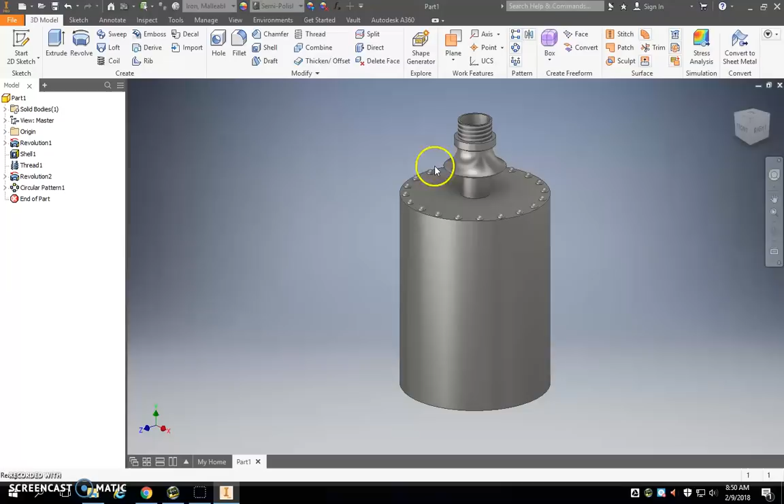Okay, so today you're going to be making a pop bottle. You can really make this however you want. Here's just a quick design I came up with, but yours will be whatever you want it to look like, and it does involve some backing up and starting things over and whatnot. But let's get started to see how we can do this.

So let me open a new part quick.

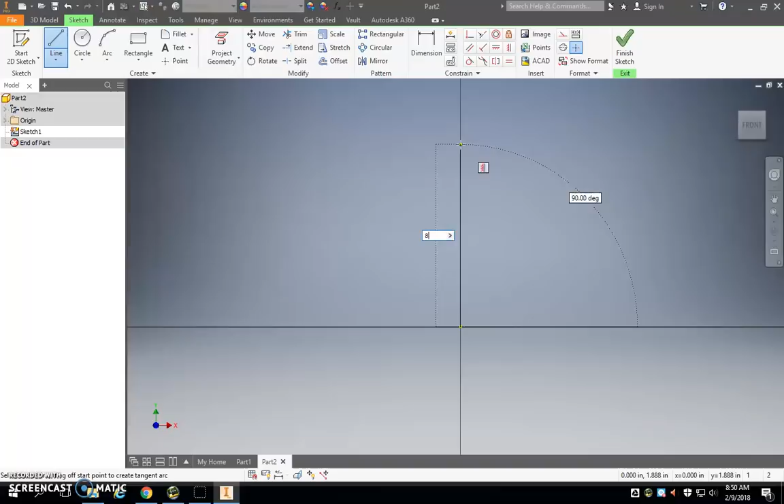Alright, the first thing you need to do is make a line that is 8 inches tall. Remember we can always use the dimension tool, right up top, to get that 8-inch line. Then you're going to take a half-inch line over to the right and a half-inch line down. Let me grab my dimension tool.

Whoops, I hit 5, so I can just double click back on it, do 0.5. That should correct itself. 0.5. Amazing. These are our first 3 lines. Pause the video and draw those in if you have not already.

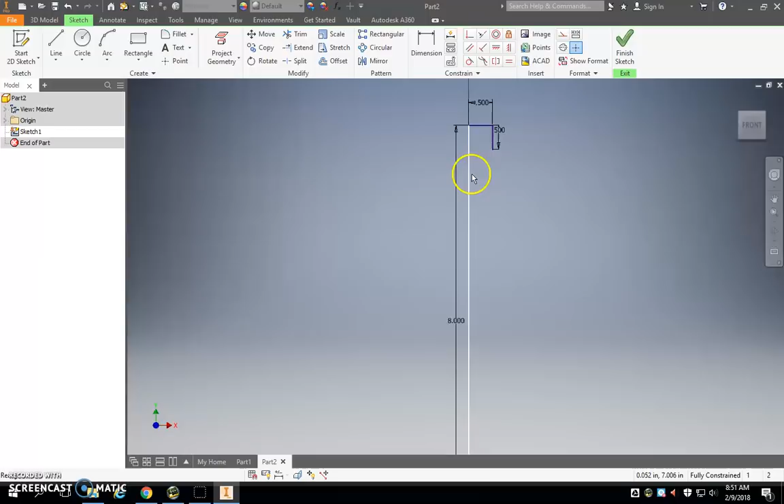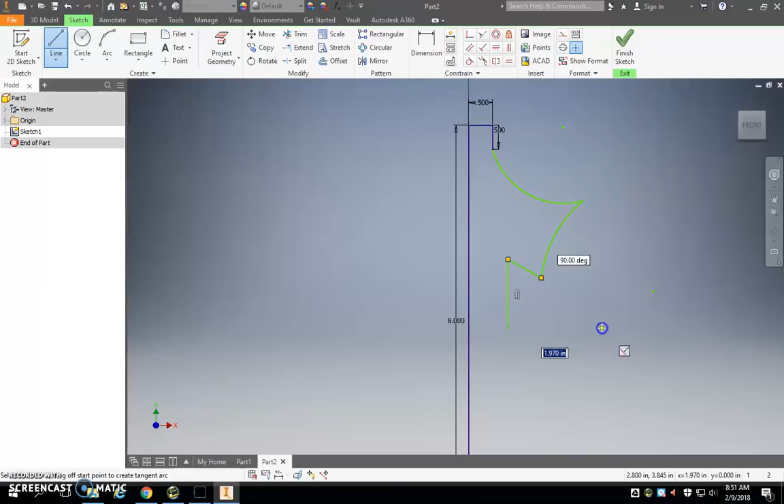From here, it's really up to you what you want to do. This basically gets us the height of our bottle, and this 0.5 is going to be the mouthpiece of our bottle. So you can take anything, spline, arc, line, whatever you want, and make your way all the way back down with whatever shape you want, back to the bottom of this 8-inch line. You just basically need to connect, whatever path you want to take, all the way back down to the bottom, and that's going to end up making the shape of your bottle.

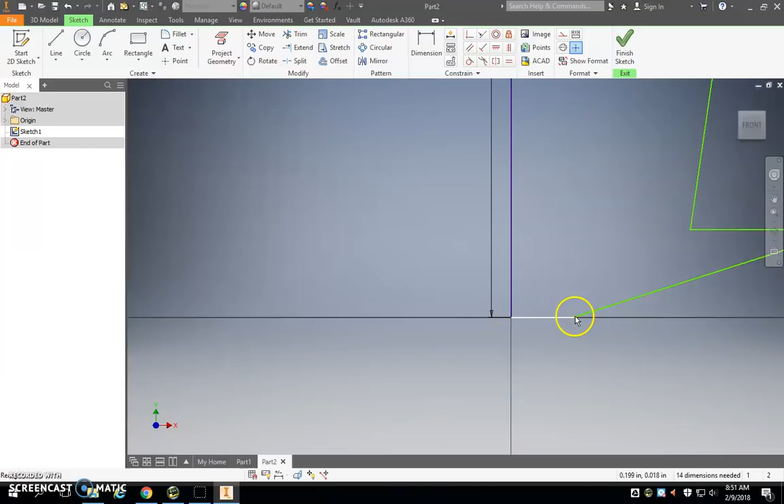A couple things to keep in mind: number one, you want at least a flat surface on the bottom of the bottle, because it will need to sit like a normal pop or water bottle would on a flat surface.

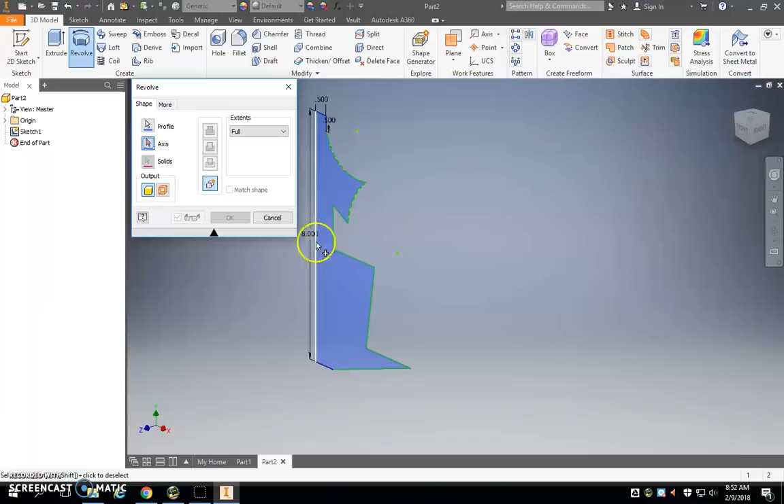Okay, so when you've gotten your lines, go ahead and finish sketch, and try the rotate or revolve tool. Click on your profile, or your enclosed 2D shape, and click on your axis. Your axis is going to be your 8-inch line in the middle here, the first one that you drew. When you click on it, take a look.

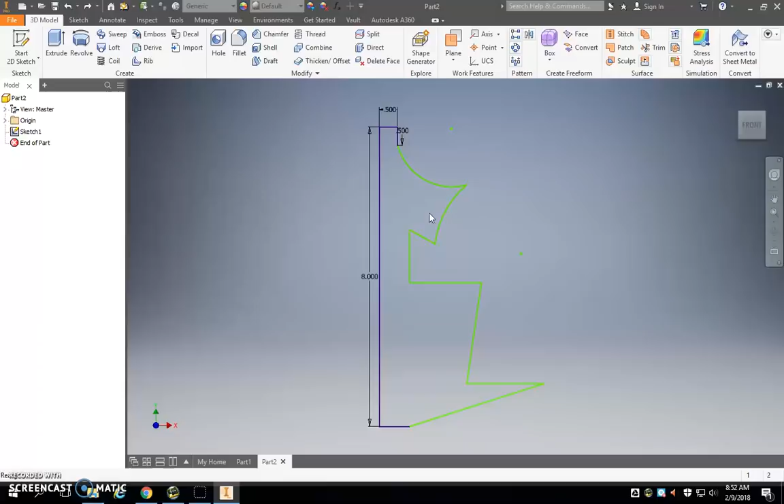They're not all going to be winners to start out, and I really want you to go through about 5 to 6 bottles minimum before deciding on one. So do this, say okay, that's what shape that was roughly, kind of remember that, draw it down if you need to, and then undo back to this point here, and start over. Maybe this time you take your spline tool and connect all the way down to the bottom. Now, for time's sake, I'm going to keep our original design.

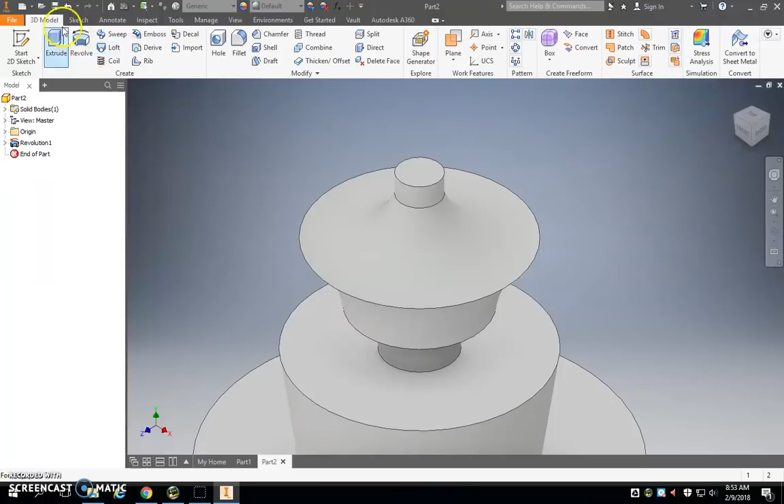After you've tried your 5 or 6 and come up with the perfect idea for what you want, there's a couple more steps. Number one, you're going to use your newest tool called Shell. It's right up here at the top in our 3D model window. Shell is an interesting tool, you got to be careful with it.

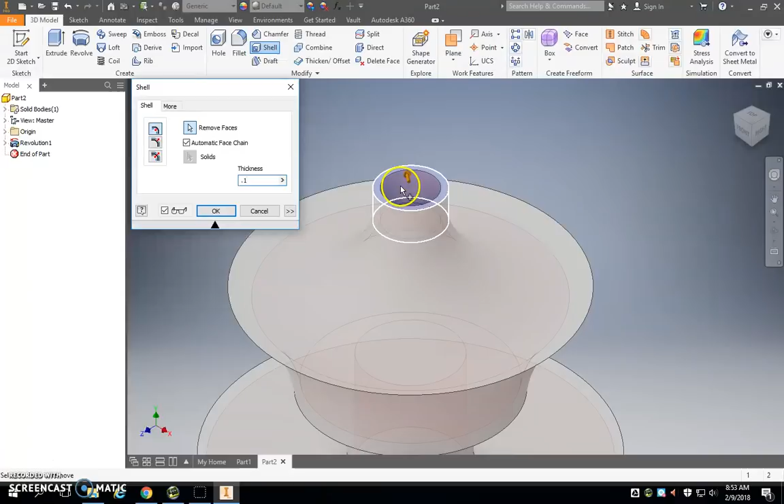First thing you do before you click on anything, go up to the top of the bottle and click. You should see it actually open then. If for some reason it's not opening or the shell's not working, you may need to play around with the thickness. By default it's set to 0.1, you can always set it to 0.01 if it's not working, which will just make the bottle thinner. If it's really not working and you're stumped, call me over. But a lot of the times, either somebody forgets to click on the top or they forget to play with the thickness, so try those two solutions first.

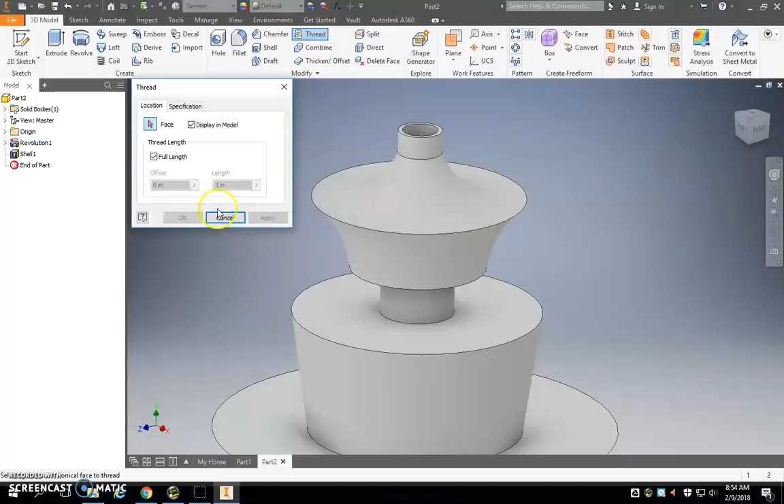You'll notice now that this thing is completely hollowed out. That's what Shell does, it hollows out the insides, and by clicking on the top there, it just makes a little opening on that flat surface. From there, we need to click Thread, which is right over here, just to the right of Shell. With Thread, we're just going to click the outside of our mouthpiece here and hit OK. So we've got a nice looking bottle. This thing is good to go.

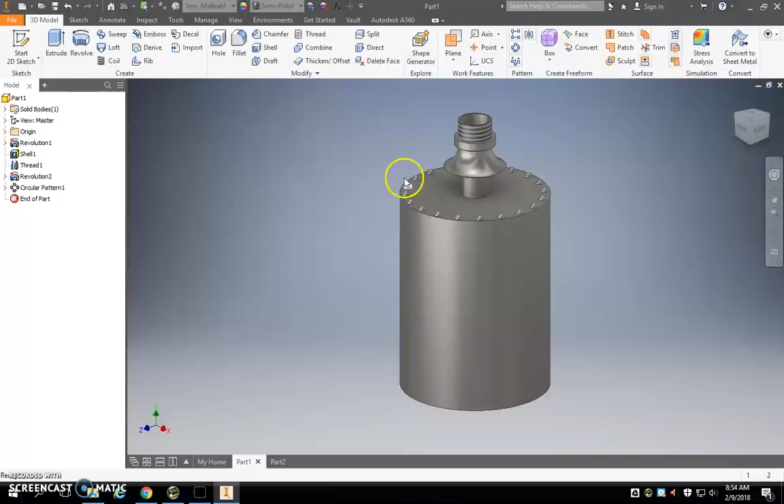I would definitely give it some other look other than just the standard gray, so decide on something that looks cool to you. And here's where you can really get it interesting. To look a little bit more like mine, I added a little flair into mine.

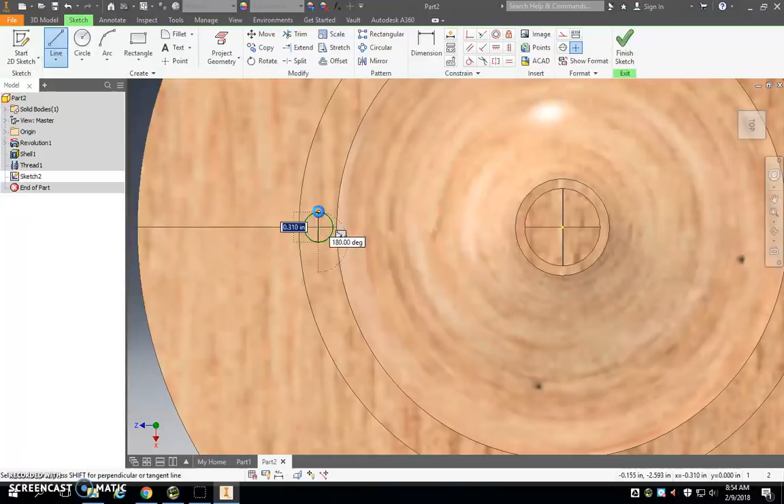For instance, what I did is a sketch. Remember, any flat surface you can sketch on. All I did was make a little circle, and then I put a line through the circle. I did finish sketch, and now watch this, this is one of those things where you'll have to do some playing around in Inventor. I hit revolve, and I clicked half of the circle as my profile, and my axis I clicked the line.

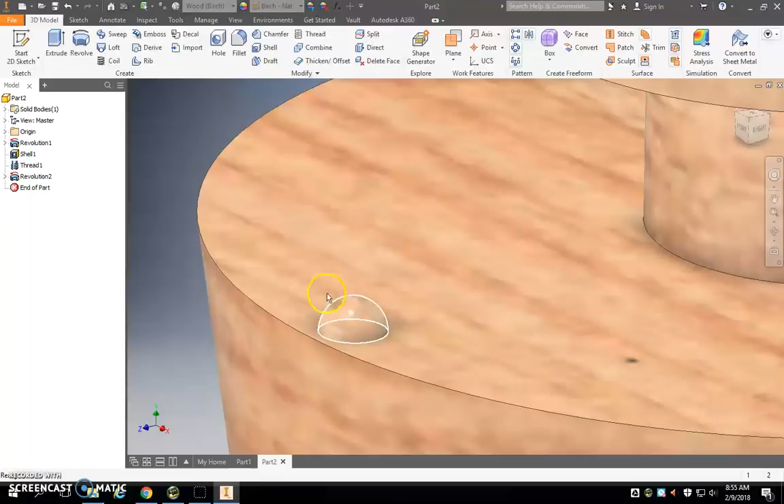When I hit OK, it gives me this little bead here. You could do spikes, you could do a little bead like this, or play around and make your own type of additional decoration on this.

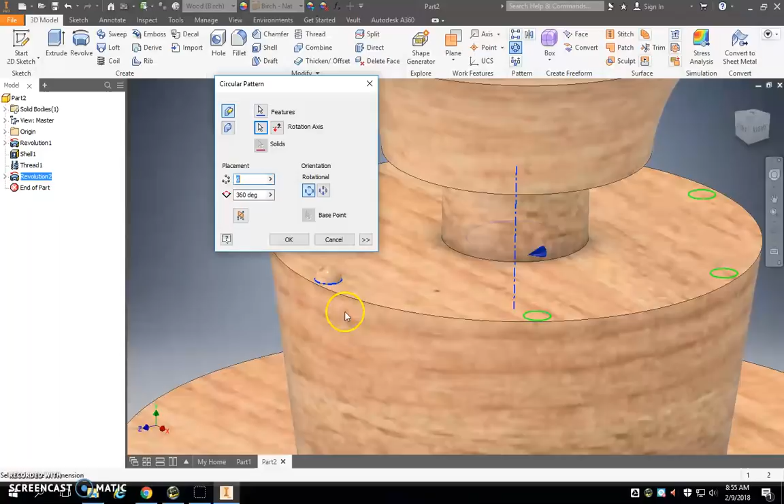Then I hit that circular pattern, once again, that we've learned about before. You just click for features, click on your actual shape. Rotation axis, just what do you want to rotate it around? I put 20 of them on there, and see how it looks. It just gives it that added little flair, your personal touch.

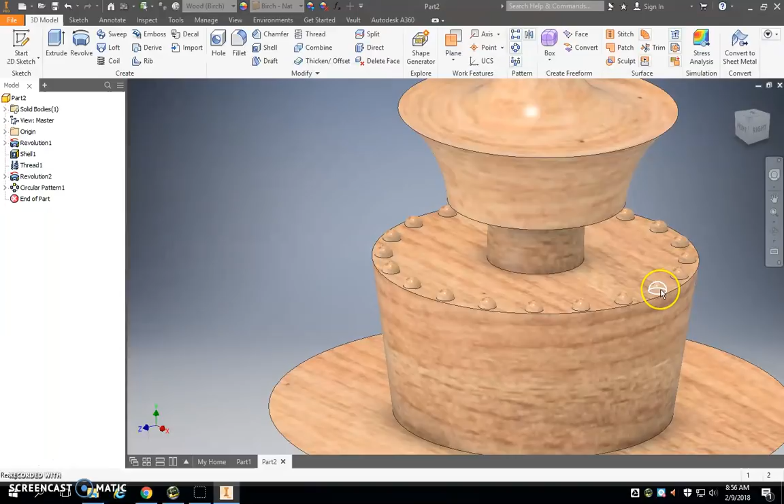I want everybody to try to do that unless you're falling way behind. We should be trying to explore Inventor, find these new things that put us a little bit ahead of, or make us a little bit different from, all of our other students around us, okay? So you want to add your own personal style to it.

You can go ahead and save that when you are done, and then try to make a bottle cap. The bottle cap is going to need to fit over the bottle, and my only hint that I will give you as far as making the bottle cap is if we go way back to the beginning.

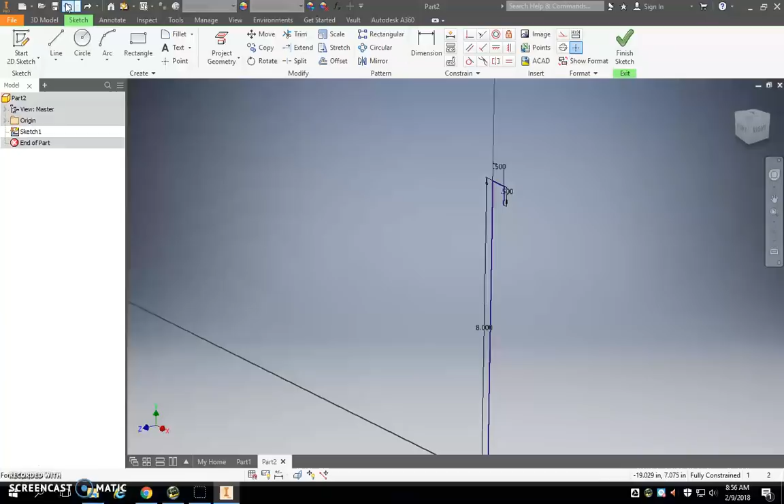When we did our revolve, we made the mouthpiece 0.5, 0.5. So when you revolve a bottle cap, you're going to have these two lines on the underside of the shape that you are revolving, 0.5 and 0.5. Good luck with that. Try your best. Remember that undo button is your best friend, and raise your hand if you have any questions.